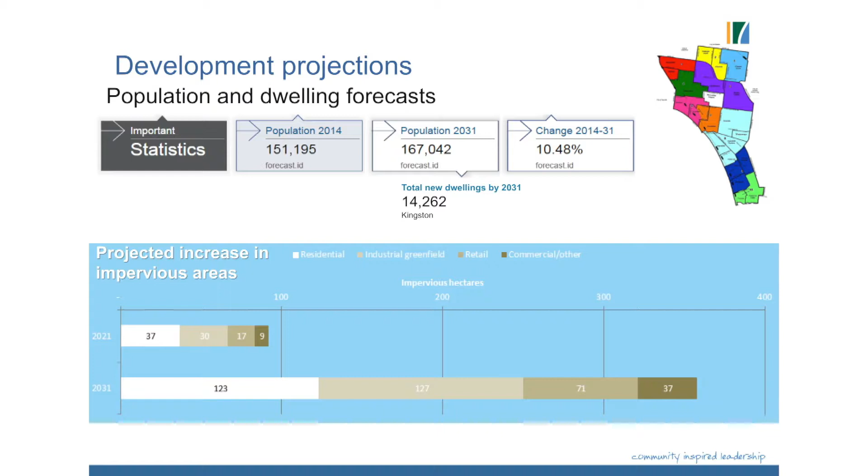Okay? In Kingston, the bar down the bottom basically shows what the future impervious area is going to look like, and essentially it's going to be mainly infill residential, a little bit of industrial, and retail and commercial and other. And on top of that, we've also got roads. So the key point of this slide is that a Clause 56 focused just on subdivision isn't going to cut it. All of the other development's just going to run over the top of it. You're going to have increasing impervious area, increasing runoff, and what we achieve under Clause 56 is going to be dwarfed. I think you've got a similar story here in some ways, in terms of the types of development profiles you're looking at.

Kingston then went on and said, okay, let's do some evidence-based research around what's going to be most cost-effective. How do we deliver biggest bang for buck? Kingston measured that as the improvement in stormwater quality, measured by nitrogen, the amount of non-potable reuse they got, so essentially public open space irrigation, and a couple of other variables that were important to them. Then they looked at different types of projects. They looked at small investments, the things on the left-hand side, your rainwater tank and your rain garden, with a very small catchment area.

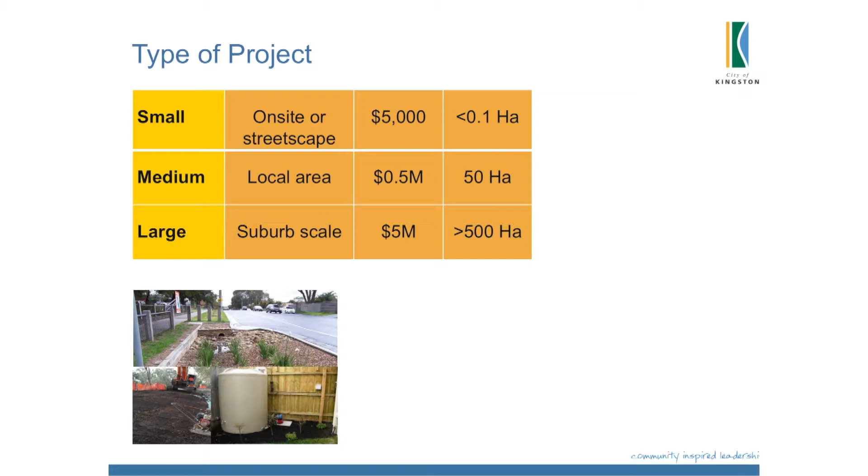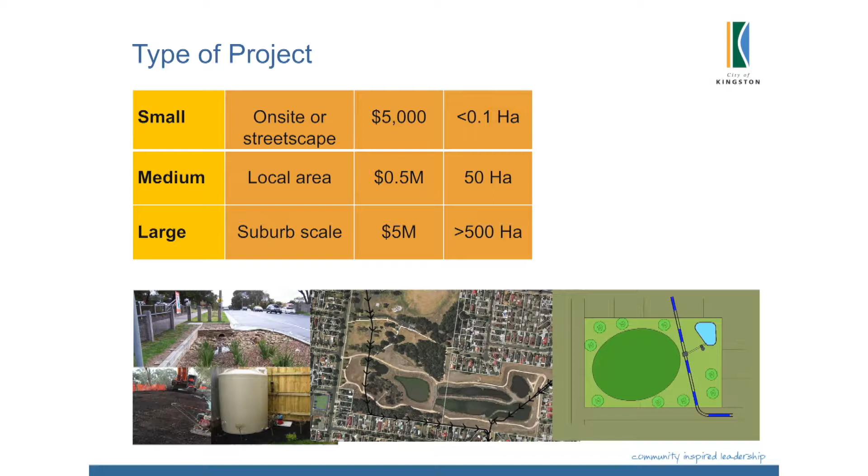They then looked at medium and large investments as well. Large investments are the ones in the middle, for example, precinct scale wetlands. And a medium-sized type of treatment is the irrigation to an oval, for example. That's capturing, let's say, a stormwater catchment area of 50 hectares. We didn't do this work. A bunch of smart engineers who we work with did this work.

But essentially what it came back showing is that the small-scale stuff is not really cost-effective on a dollar-for-dollar basis, and there's also a higher risk of failure. The large scale has the same problem as most infill areas: they don't have the land to put the assets in. And those middle-sized infrastructure pieces proved to be most cost-effective. They also sit on Kingston's land, which means Kingston can own, operate and maintain those assets.

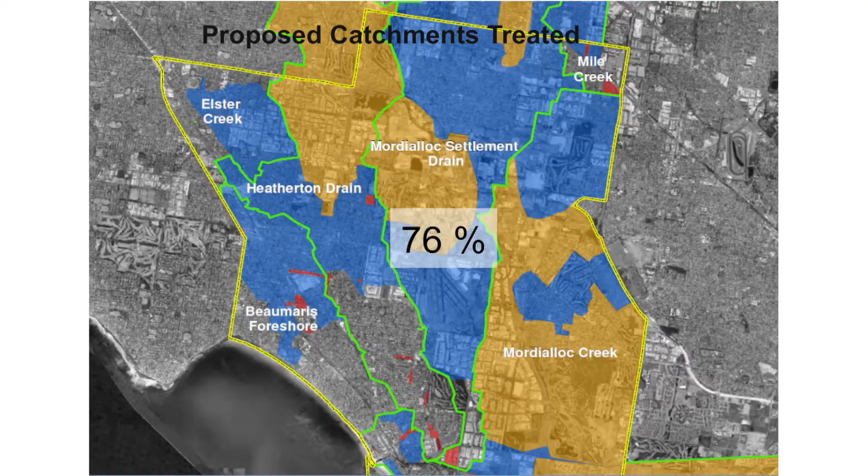So Kingston basically said, okay, at the moment we've got 40% treatment. With a series of proposed investments, they identified 31 odd precinct scale assets, and with those assets we can get up to about 76% treatment efficiency. So essentially that goes back to Andy's point of, know what you're going to build before you start gathering cash. So Kingston has a prioritised list of investments, and they've modelled using MUSIC what that's going to do to waterways and water quality and loads entering the bay.

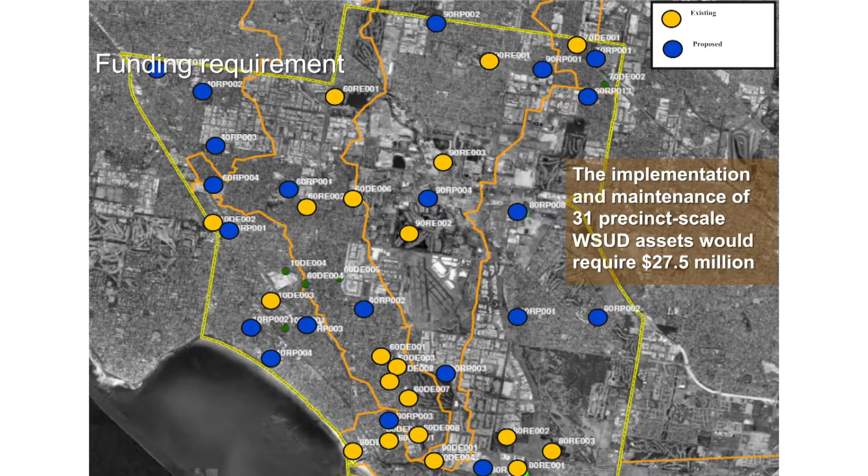Now we get to our next stage. For those 31 precinct scale assets, the capital cost alone is about 27.5 million to achieve those outcomes. So the next question is, how do we fund that? As we were talking about this morning, there are a range of different options. The brief, and this is really where we came into the project in 2014, is Kingston said to us, how do we fund these 31 odd precinct scale assets in a way that is cost reflective and impactor pays? So basically, if you are creating impervious area, as Andy said earlier on, you should be paying for the stormwater runoff from the impervious area that you create, because you're creating the impact.

The second point is really important. We want to give the developments flexibility to meet best practice stormwater management. So we don't want to lock them into an either or situation. We want to give them choice. And that choice is really important in Melbourne in particular, and I'll explain why in a second. We want it to be equitable. So if you've got a square metre of impervious area and you're residential or a commercial, you're treated exactly the same way, not different rules for different people.

We want it to fully fund the life cycle cost of the investments. So one of the things that Brigitte was speaking about earlier on is that developer charges and the Melbourne Water Offset only funds the upfront capital cost. Kingston came to this point after we talked to them. They realised that if they just fund the capital costs, then essentially what happens is the ratepayers cross-subsidise somebody else for maintaining and rehabilitating that asset. And when you've got a growing asset base, you've got a growing deferral, you've got a growing sort of bow wave that you're going to have to address in capital rehabilitation. So they said, can we fund the full life cycle costs through it? This hasn't been done before in Australia.

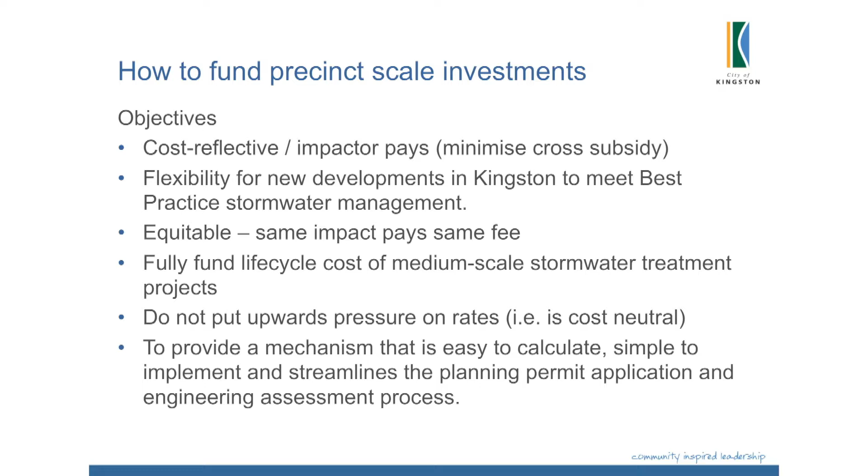And then finally, we want to provide a mechanism for everybody that's easy to calculate, simple to implement, and streamlines the planning permit application. So rather than making things more difficult, can we make it less difficult? Essentially, they were the guidelines that we were given when we started out on this.

So I'll tell you what's being implemented, and then I'll tell you a little bit more about what it is. The end point that we've got to now, and I would say this has been implemented. It's up and running as of January, and I'll show you some stats on how many applications and how much they've collected. But what is being implemented now is that, first point, this only applies to new developments where you have to have a permit through council, but that covers a whole range of commercial, industrial, residential, and other types of developments. So it's got very broad application in Kingston.

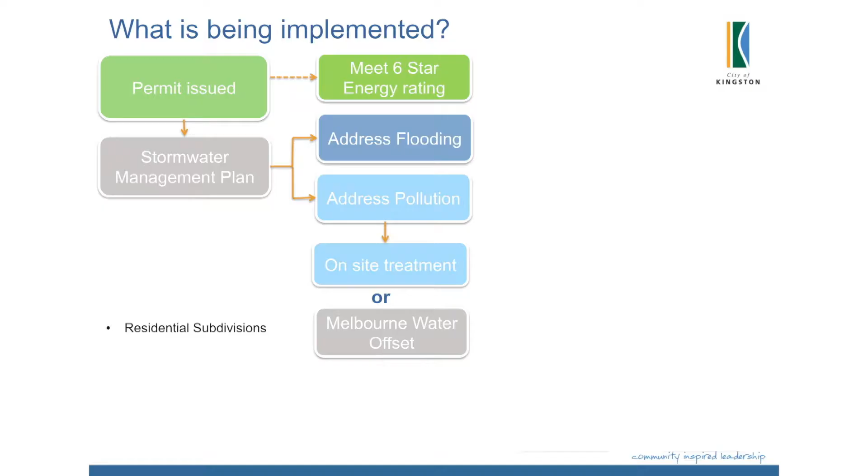The developer has to provide a stormwater management plan that addresses flooding and addresses pollution. They then have two choices around how they address, in particular, the pollution, so stormwater quality, on site. So they can either do it through on-site treatment, i.e. put in rain gardens or rainwater tanks or whatever else, or they can use the Melbourne Water Offset if they're in one of the areas that Brigitte talked about in Kingston where that applies, or they can opt in to the Kingston voluntary contribution mechanism.

And under that mechanism, it's exactly what Andy described. Essentially, they pay a per square metre impervious charge, and I'll tell you how we calculated that in a second, but it's slightly different from offsets. So they pay that money. Importantly, that money goes into a reserve fund, which under the Local Government Act is ring-fenced. So this is ring-fenced money.

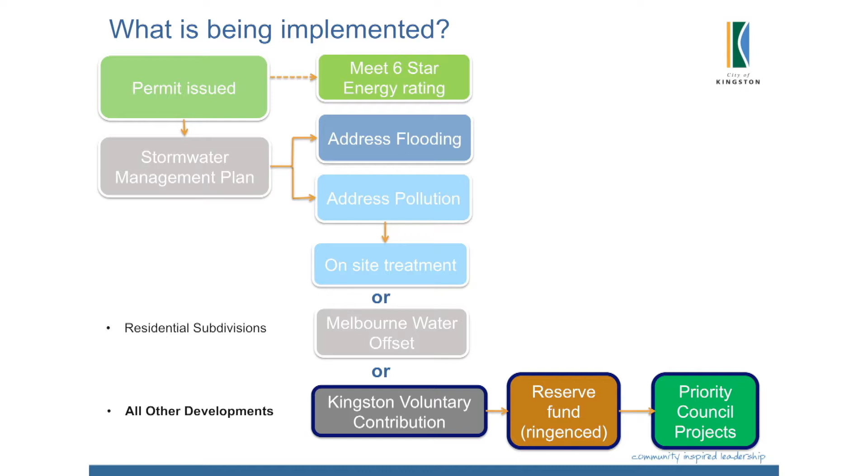It's also audited money, and Kingston is under the obligation to have it audited and also to then publicly notify people that the funds are being used properly, and also the types of outcomes that are being delivered with that funding. So there's a clear line of sight and transparency, but importantly, it's ring-fenced. And then that money is used to invest in priority council projects, both for the assets to be built, the assets to be maintained, and the assets to be rehabilitated.

Okay, a bit of a busy slide, I apologise. So what's different about this in lieu fee? First of all, again, as I said, this only applies to areas where you have to get a permit and you come into the scheme. It's not retrospective, doesn't apply if you don't do anything to your lot. But if you know what your development front looks like and you've got a reasonable amount of confidence in it, this gives you stable revenue or stable cash.

The first point is the in lieu fee is cost reflective, so the impactor basically pays based on impervious area. The second point is, okay, it's flexible. So we were asked to make a flexible mechanism.

It's flexible because it allows the developer to choose to develop on-site, do the compliance on-site, or to pay the fee. This is really important in Victoria because we have this thing called VCAT. If you have a fee or a charge, at VCAT, which is the Victorian Civil Administrative Tribunal, it can basically be challenged by developers, and they will challenge it. So you're going to get bogged down in VCAT with a fee. If you make the mechanism voluntary, they can't, because they're opting into the mechanism.

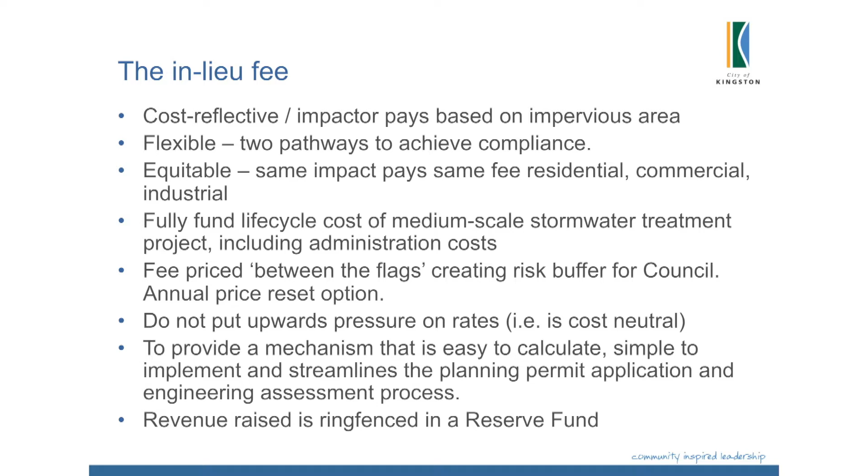It's easy to calculate. I can provide you with a link. Kingston has resources online, which has the calculator so developers can see exactly what it's going to cost. And the money goes into a reserve fund. In lieu calculation, here's a worked example. The main point here is, as I said, the charge is an impervious area charge, so per square metre.

You can get credits if you're doing retention on site and other things. You can get a credit back. That's all figured out at the permit scheme. For these guys, and this is a real development, they calculated that it was going to cost about $34,000 to do what they needed to do to meet their obligations on site. The in lieu fee was $29,000, or just under 30 grand, before any credit back.

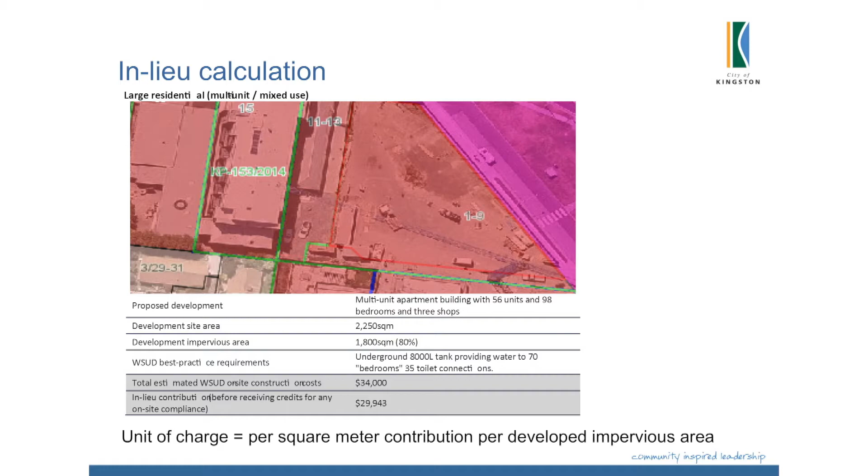They've gone ahead with this. And the reason they went ahead with this is they said it's kind of line ball, but it gives certainty, it goes away, it speeds things up. So this for them was a no-brainer, and it's one of the reasons why I'm showing it.

So progress to date, this is the last slide. As I said, we commenced in January 2017. We commenced with a very quiet start because we wanted to bed it down and make sure that everybody was comfortable. So really the scheme has only been announced in public with developers since about mid-year.

Kingston is a leading council. If you want to talk to councils about how to do infill issues, Kingston, I reckon, is probably best of breed in Melbourne. Great bunch of people to work with, and they fall over backwards to help out other councils. So if you want to have a chat to people, Birgit or I can put you in contact with them about how to do it.

But they worked very closely with Melbourne Water. They received second round funding from Living Rivers for the implementation of this. Through that, we've established a framework that allows them to monitor, evaluate and communicate the impacts and outcomes of the scheme.

To date, and remember this scheme is maybe 5 months old in reality, they've had 25 applications for contributions. They've received 300 grand in lieu payments from 14 transactions. There's another 10 or 11 still in the pipeline. That's another $500,000 from talking to Emily the other day. The largest payment was $55,000 for an industrial warehouse, 5,700 square metres. That's now sitting in the reserve fund.

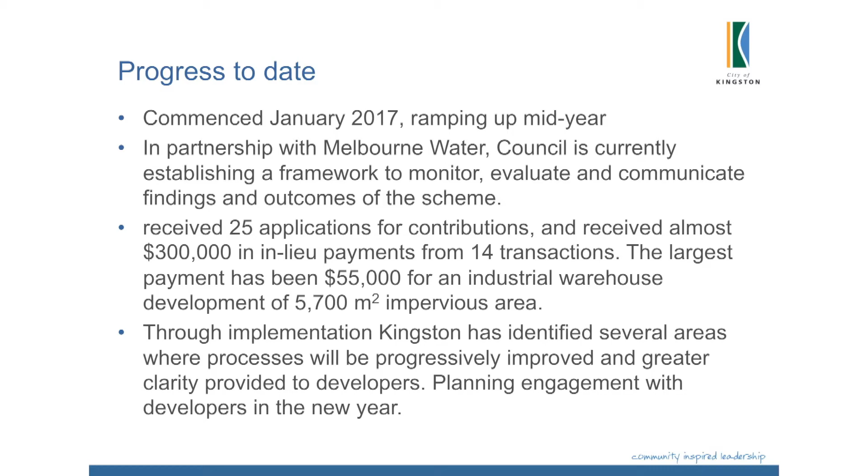The ramp up, we reckon this is going to earn them about $1 million a year. And the reason that we've set up the mechanism this way is because they've got the same sort of delivery issues. $1 million a year is about what they can handle in terms of infrastructure planning and delivery without falling over the top of themselves and starting to have issues in terms of implementation. So we're matching the cash flows to allow them to deliver works and give them a bit of headroom.

The other thing about the mechanism is they can reset the price. So they're not locked into a price, they can do an annual review. And that means that if they find that they're not getting enough opt-in, because the price is too high, they can drop it back. If their costs of construction change, they can do that as well. So it's an adjustment mechanism that works over time, and there just needs to be a little bit of signalling for developers.

And then through the last 6 months, we've identified areas where, as always with these sorts of things, once you get into the reality of implementation... Donald Rumsfeld once made that famous quote where everybody guffawed at him: there are things you know, things you know you don't know, and then there are the things you don't know you don't know. Everybody laughed at him, but the more you think about it, there are things we didn't know that we didn't know, and you learn by getting stuff wrong and then trying to get it less wrong the next time.